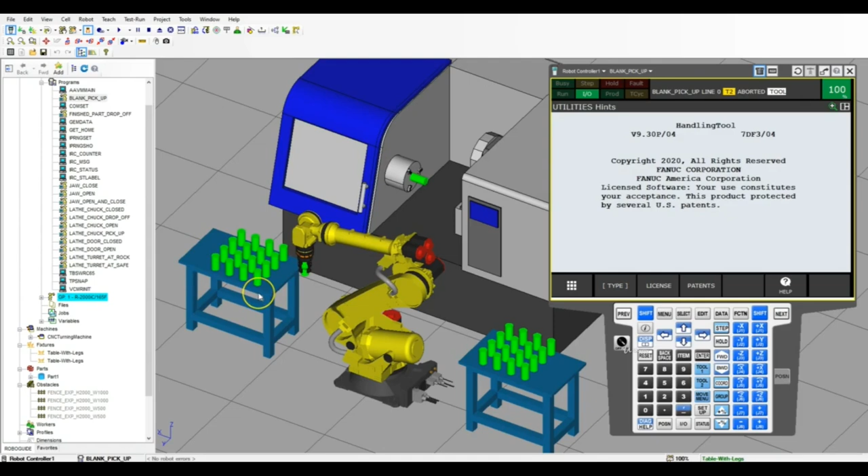Let's look at some of the programs we've already created, starting with the data registers. The first data register is a counter just in case we need it, and then we have our start row and column, meant for counting which part we're on per row and per column. We also need one for the end, so we have column end and row end, which is our placement.

Then let's go into our position registers. Inside we have a couple save points: the home position, which the robot is at right now; a pickup position, which is the first initial part; the lathe chuck position; and the placement position. Both the pickup and place positions are going to be changing as we manipulate that position register. Going down, we have our offsets.

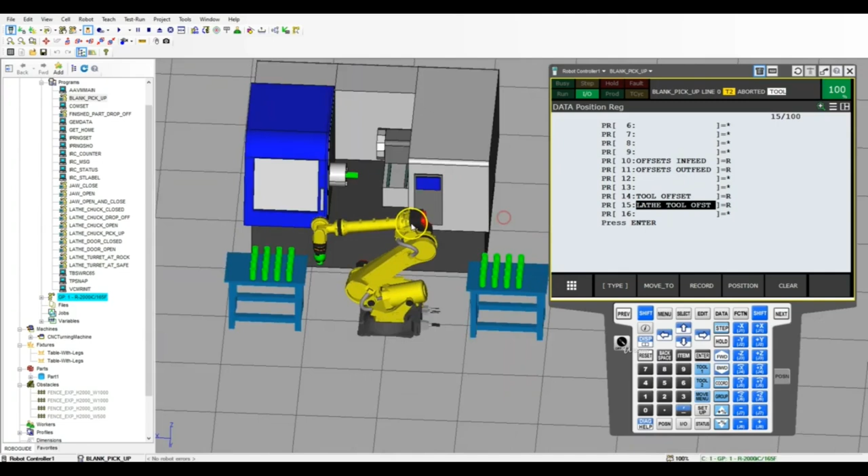This is the number in which we're going to offset from left and right to do the rows and columns, so we have offsets for the in feed and offsets for the out feed. We also have a couple tool offsets because we're going to come down to a safe position and then back up to that safe position, utilizing our tool offset. Because we're in a more confined space with the lathe, we made a lathe tool offset as well.

Now the numbers we put into this, we initialized as zeros. We don't have to worry about the actual number because we're going to initialize it in our actual program, but just to show it was at zeros - we have it set right now at 300, but that may change depending on how the program actually plays out.

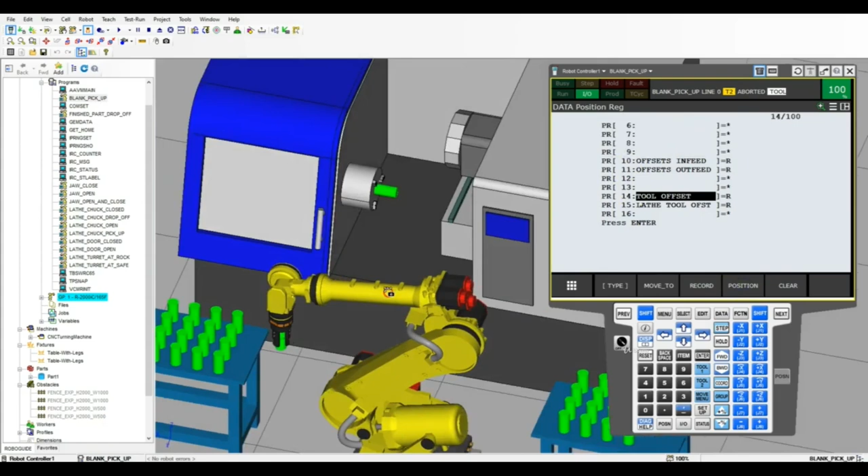So those are going to be the main position registers and data registers we're going to utilize. We're going to be using tool frame number 1, which is our gripper, modified to be a little smaller so it can fit inside the lathe more easily. We also have frame 0, which is our world frame, where everything's based off 000 for our robot.

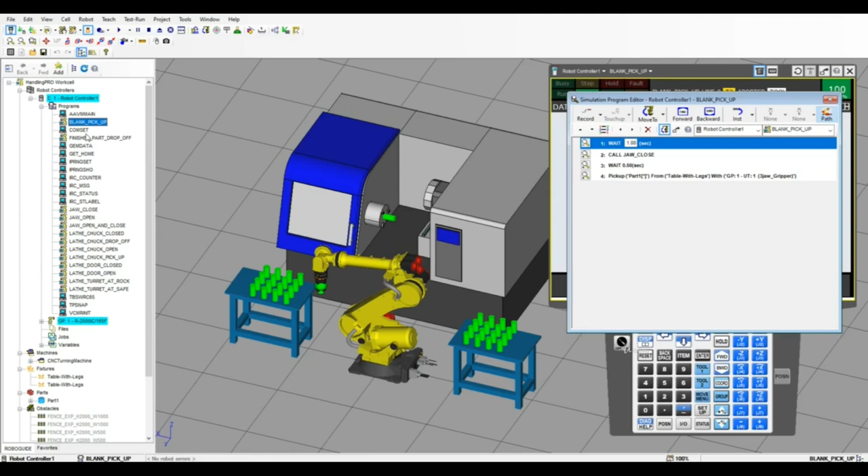Going on up here, if I go to my blank pickup program - again, these are simulation programs to represent that we are picking something up and then placing it. In actual programming, you would have either a robot output or a digital output for picking up your device. A robot output may be hooked up to your solenoid or some electronic device, so that's your actual output - that's where the programming in real life differs a little bit.

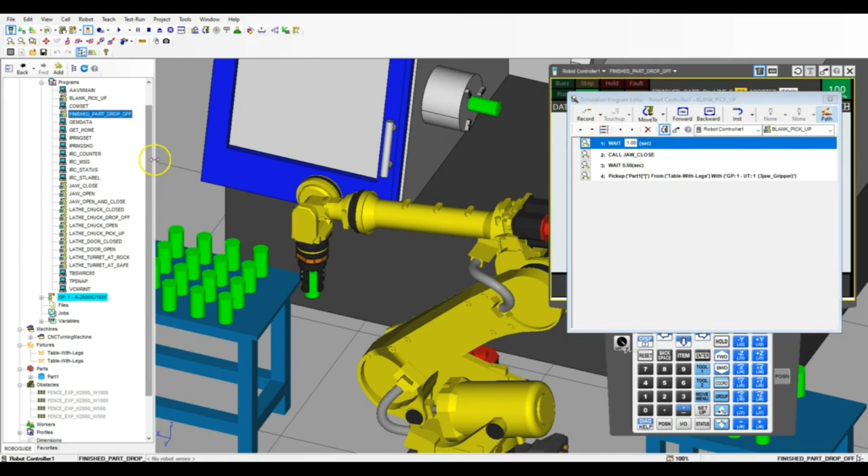So if we go to the blank pickup, this is where we have the jaw close, and then we have the finish part drop off over here. These two are going to be the pickup and the drop off. Then we have the programming for our actual jaw open and jaw close.

If I close this out and go to our program, here is our jaw close, which is a digital 1 output off, and it's waiting until that happens. Then we have jaw open, which means digital 1 is on, and we're waiting for digital 1 input to be on as well. So jaw open and close was a program that we did - we can actually delete this one so we don't get confused.

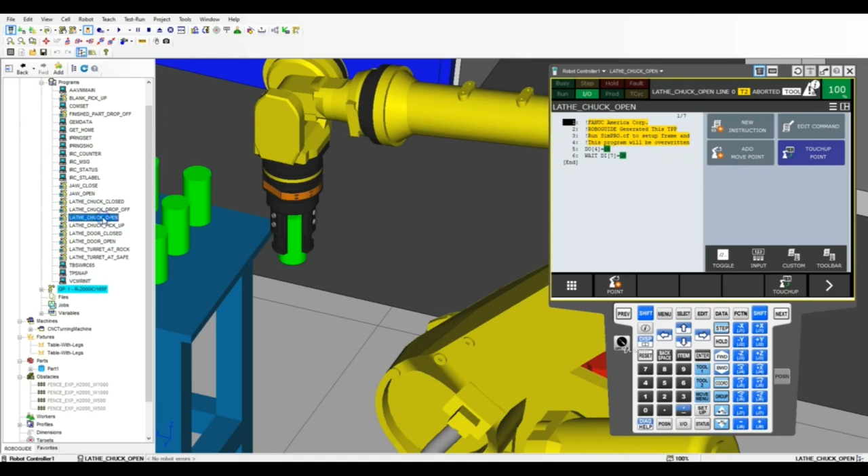Then we have the lathe chuck close and lathe chuck open, which are just opposites from each other. We have the chuck drop off - this is the program in which we drop off the actual part into the chuck. You can see the lathe chuck opens, waits a second for that to happen, then drops the part off, calls the lathe chuck to close, and then closes it. Same thing for lathe chuck pick up - when we grab it, the chuck opens and then we move it out of position.

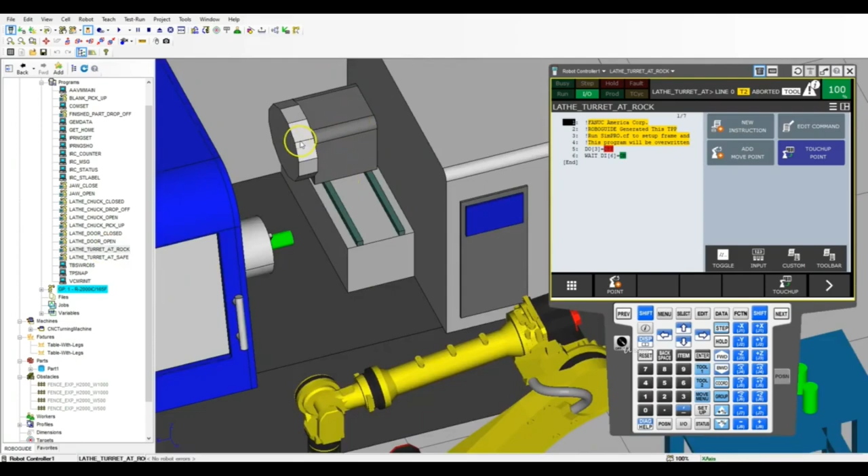We have the lathe door open and close, which are basically opposites. We also have the turret out of the way and in the safe position - ready to rock is forward, and safe position is back. Those are going to be the main simulation programs we'll call upon as we program our robot. Alright, so the first program we're going to create is getting the simulation to be in its start point.

So we're going to have our robot in home position, we're going to have our door closed, and we're going to have our turret towards the front.

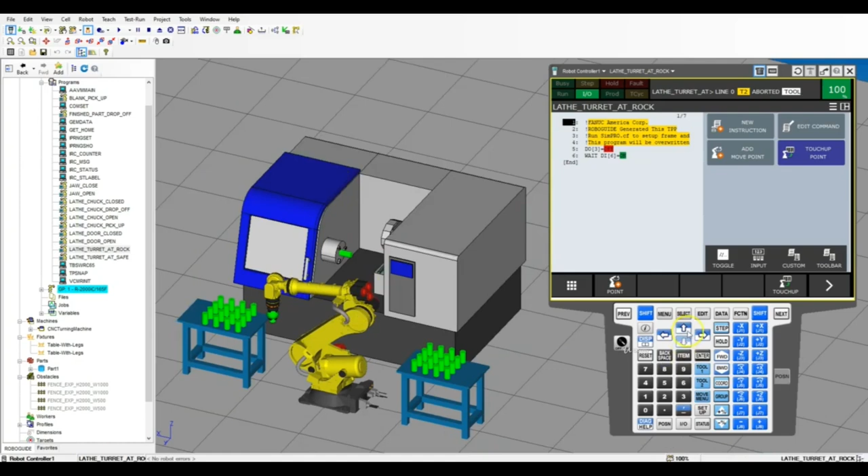So everything initialized so that when we begin our program, everything is at the same start point. Let's go select, and we're going to go create. This time what I'm going to do is put A in the beginning, underscore, and then simulation item start point.

The first thing we're going to do is make sure that our robot's at home. So let's go add move point, and we're going to do a joint movement, using position register number 1, which is our home position.

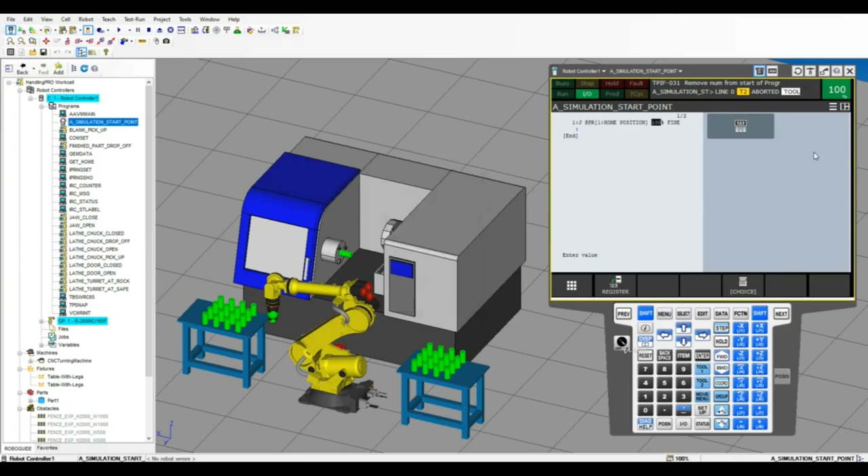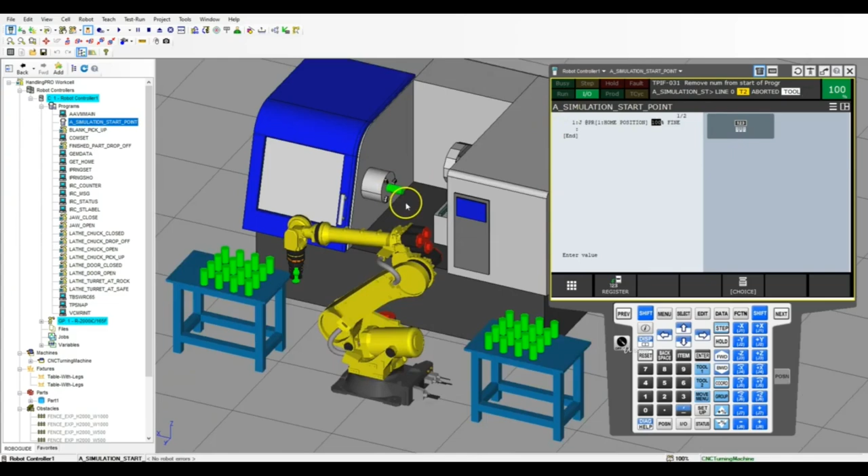Later on we'll actually program a smarter way of doing home position, because right now, depending on where the robot is, if we call home position, it could crash into our devices or our lathe, and it could cost thousands of dollars to fix. We always want to make a smarter home position. So you saw in all these videos so far, I just called out a home position, assuming the robot's not going to run into anything. Later on, we'll make a very smart home position in which it looks at where the robot is in relationship to the tables, the machines, and the fixtures around it, so it can determine the best course back to home position without crashing into things. But right now we're going to just call it as a home position because this is a simulation, and we will do this a little bit later.

Let's add the turret in the correct position. So let's go add new instruction, call program, and the first thing we're going to do is lathe turret at rock and roll position. So there's our rock and roll position.

Then let's go down to end. Let's go new instruction, call. Next one is going to be the lathe chuck, actual chuck parts, going to be inwards, we'll call it lathe chuck closed, because we're going to open it. And then we're also going to call the door closed.

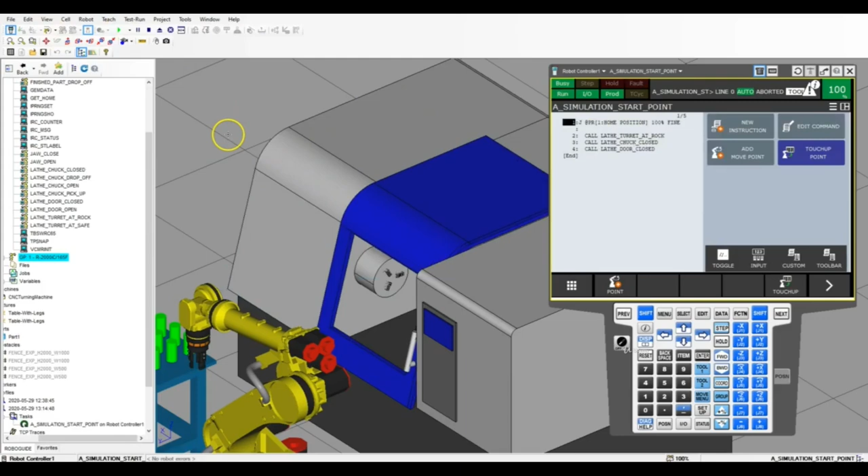So now that we have the lathe turret at rock and roll, we have the door closed, and we also have the chuck closed as well. So this is going to be our simulation starting point. So if we run this, everything is going to be closed, chuck's going to be open, and then our turret is going to be also towards the front. Let's also make sure that our jaws are open.

New instruction, call program, and then here's jaws, and we're going to have them open.

So now that everything is set up for our first simulation program, let's make a new program called the master program. We're going to go select, and create, and once again I'm going to go A, so everything's in the beginning part. We're going to call this master lathe program. Enter, and we're going to enter into this, and the first thing we're going to do is set up our frames.

So we're going to new instruction, miscellaneous remark, let's add frames to the beginning, and then new instruction, and let's set up our frames. So utool number 1, and then our user frame 0, which is going to be our home 000 based on the robot.

Then let's go to edit command, EDCMD, and insert a bunch of lines. So let's insert maybe like 30 so we have some space.

Okay, so the first thing we're going to have is we're going to reinitialize our simulations. So we're going to go new instruction, miscellaneous, remark, and we are going to put in our heading of simulation item start point. So simulation ends at start point, and then we're going to call upon that program. So new instruction, call program, and then we're going to have a simulation start point.

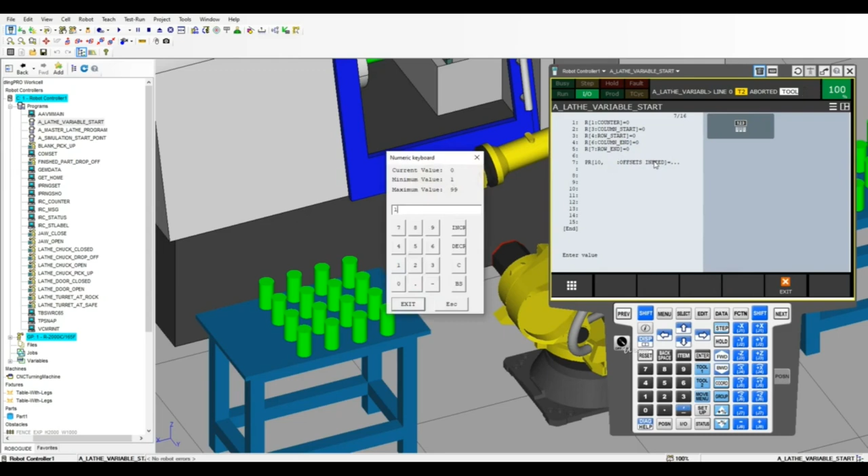Let's go edit, registers equal to position register IJ. We're going to use position register number 10, which is our offsets infeed. We're going to first initialize the X coordinate, which is number 1, and set that equal to 0. Then initialize position register IJ, number 10, and the Y component, which is number 2, setting that equal to 0.

Then let's go registers equal to position register number 11, and the X component is equal to 0, and then position register 11, Y component is equal to 0 as well.

Then let's do our tools. New instruction, registers equal to position register number 14, which is our tool offset, and we're setting the Z component, which is 3, to say 300. So that's our Z component. We don't know if this is going to be positive or negative yet - it depends on our tool frame, so we'll have to go in there and check it.

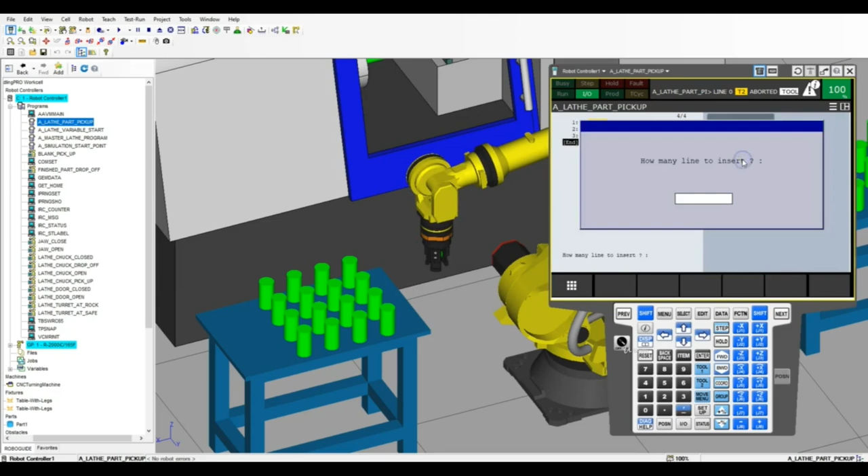The first thing we're going to do is set up to make sure our frames are correct. So we got our frames - let's go just like 10 lines or so. Alright, so now that we're in home position, let's just make sure we're at home position. We will make a smarter home position later on. We got our home position, and now we need to go to our starting point.

So let's actually go to our program - this is going to be our actual pickup program. Let's add a couple move points. So let's go add move point, and from our home position, we're going to go as a joint movement. Before we change this, let's go edit our default motion and make sure that they're what we want. I have it set as 1000, 1000, continuous motion of 20.

I usually go between 20 and 30, and then we have 100%, 20 point. So if you want to modify that before we start programming, just go into the edit, add point, and then edit our default there. I usually call it edit definition, but it's just editing our default.

So we're going to go as a joint movement, and then linear down to our position. Then we skip one line, and then we're going to pick up, and then linear back up again - so we're going to add move point, linear back up. Right now you'll see this as position 1, position 2, position 3, but we're going to use a position register for our point. Position register number 2 is going to be our pickup point.

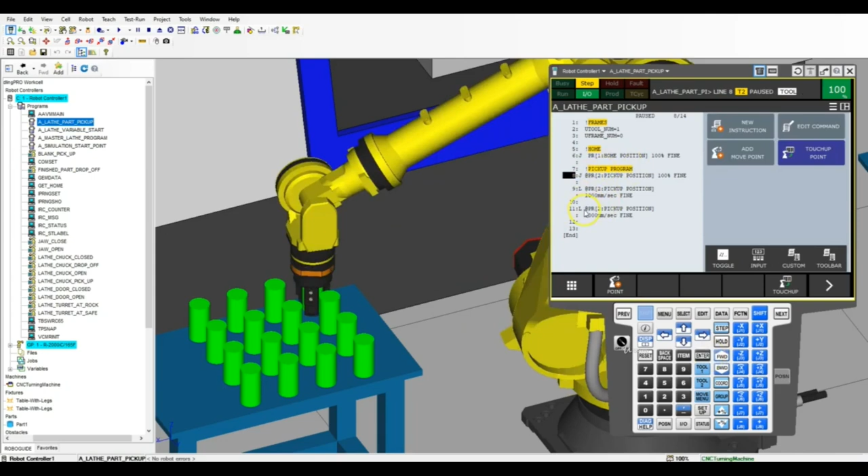So now what we can do is just go step mode and then shift forward, and it'll bring us to that position. So all 3 of these now have the asterisks because we are at that position. Now we need to add our tool offset to this.

So go arrow all the way to the end, and then go tool offset, position register, and we're going to use position register number 14, which is our tool offset. Then it's going to go down to this position, pick up our part, and then linear back up to our safe position. So let's add our tool offset, position register 14.

So let's try this out. Let's run this. There we go. So now we have our position register.

Now we need to add our pickup area. So let's go to line 10, the one that we skipped, and let's go new instruction, call program. And then we are going to do our pickup, the blank pickup, and that'll allow us to pick up that part.

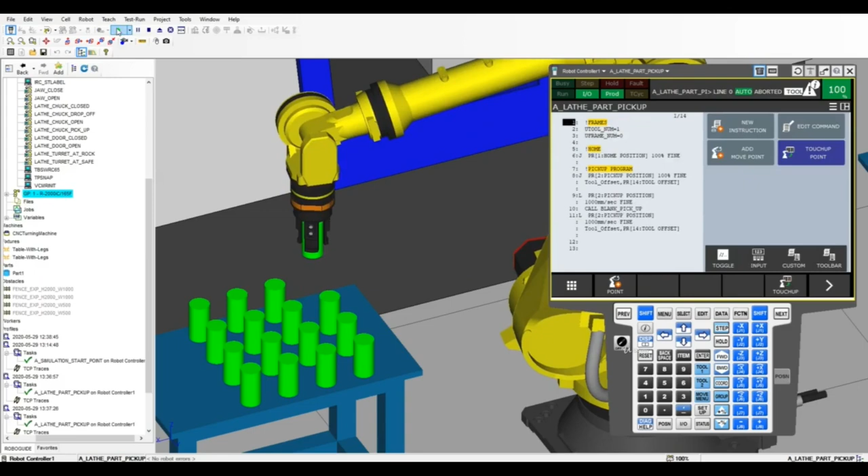So if we run this now, it picks it up. And then if we want, we can go back to our home position afterwards, because it probably makes sense to swing from our home position over. So let's go to number 12 here, all the way down, and then let's add our home position to the end here. We'll just clean this up a little bit.

So now what I'm going to do is add some headings here so that it has a little bit more clean to it, so we know exactly what's going on. So I'm going to pause the video and then come back and show you what it looks like. Alright, so I just went back in here and cleaned it up a bit.

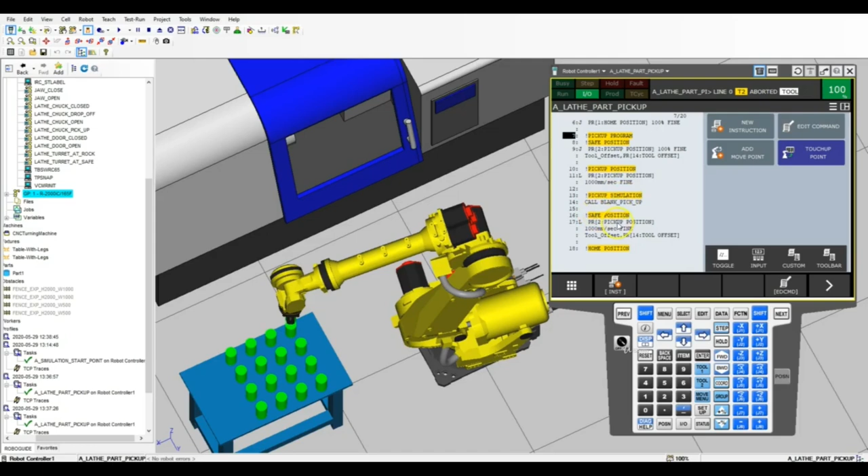So we have our pickup program. Here's our safe position. Here's our pickup position. Here's our pickup simulation. Then we go back up to our safe position, and then we go to our home position. So let's run this and see what it looks like.

Goes to our safe position, and now we have our beginning part set up. Inside the main program, that's where we'll actually do the loops, but this is basically the same thing. It's just using the offsets that we're going to utilize.

So let's go in here also, and let's add our offsets to our program so that we're able to offset left and right as we create it. So we're going to go to the end of our safe position, and we're going to go offset frames, position register, and we're going to use position register number.

Let's go to data. Here's our offsets in feed. So we're using position register number 10. So let's go back in there, position register number 10. So let's do that for each one of these.

So just double check to make sure we have position register on each one of these motion groups. So we have position register number 2, pickup position, and we have a tool offset of upwards, and we also have an offset of the in-feed. So that will allow us to shift over each time we do that for loop.

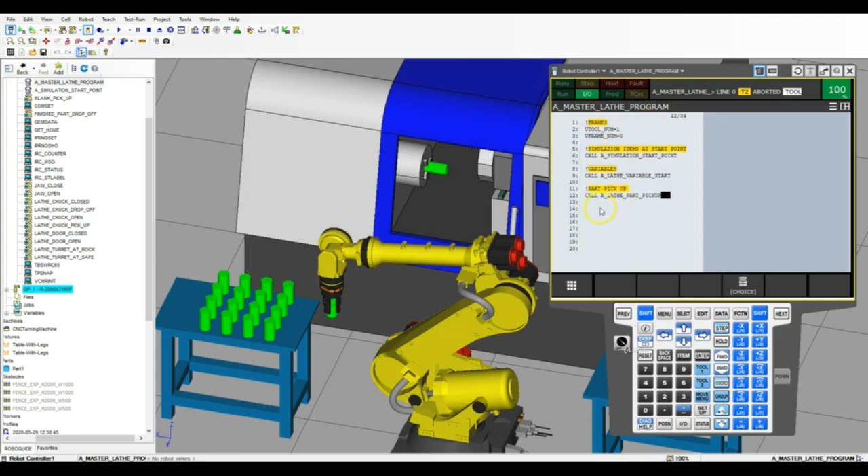Let's add that to our main program. So let's go select, and let's go to Master Lathe Program. And then here's our part pickup. So let's go add new instruction, call program, and then we have our lathe pickup. So now when we run this, the whole thing runs to where it's supposed to be, and we have our variables.

Alright, so when I was running the simulation, I kept getting an interpolation 214 error, and doing some research that has to do with motion groups. So if I go into the actual motion group for my master lathe, I noticed that we had it as an asterisk. So let's go to detail, and right now we have an asterisk here. Let's go to motion group number 1, enter, and then let's go back to that program. So let's go to the end, master program, and now when I run this, I should not get an error anymore.

So now everything is running properly, picking up, and now we're at that position. So now we have our frames, our simulations, our variables, our pickup. The next video, we'll move on to the placement table, and then we'll also work with our lathe part, and then we will do the for loops after that.